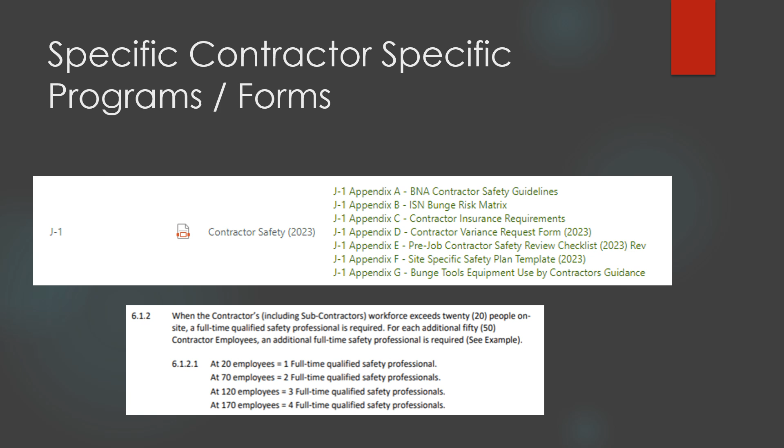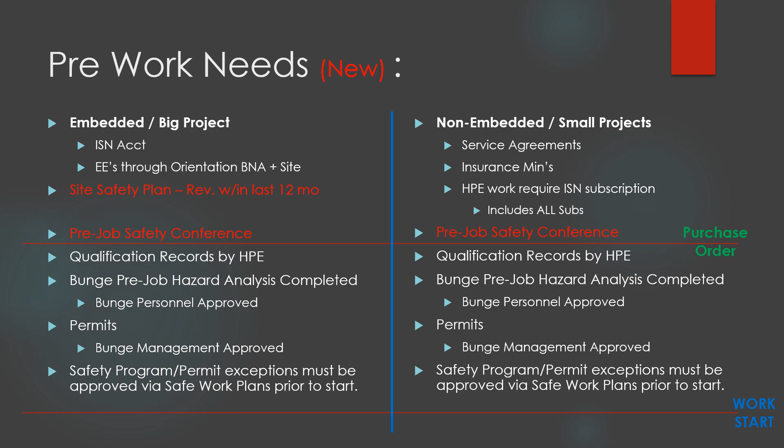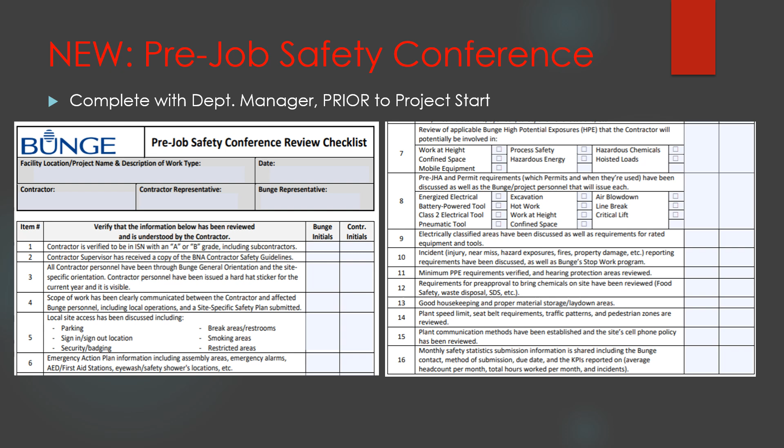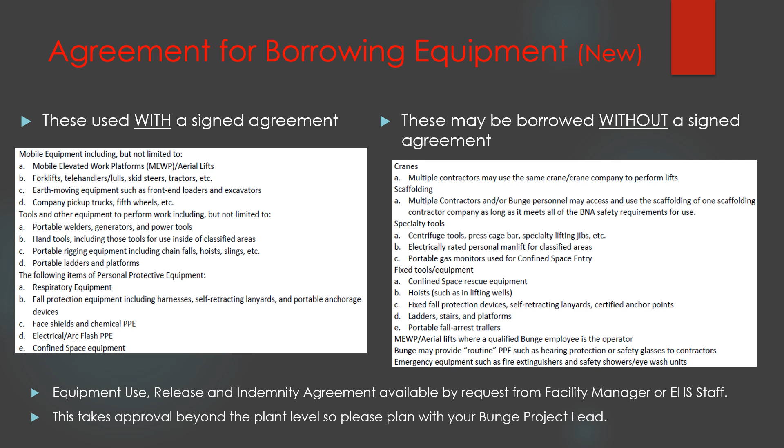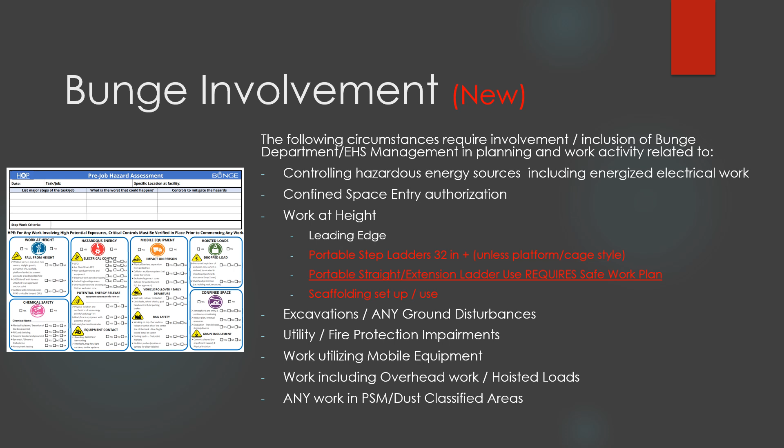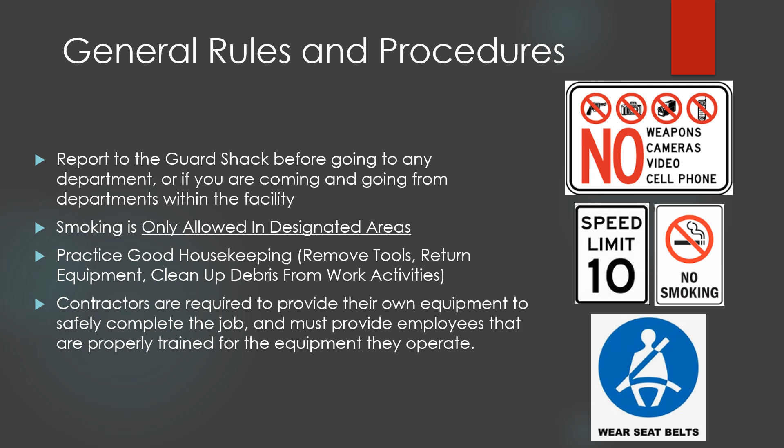Please be sure your employees are trained and qualified to do tasks expected of them. Bunge expects anyone not yet qualified and in training be with another, so work is supervised and still effectively safe. We reserve the right to request individual training records at any time.

Please be sure to use dedicated contractor parking or staging areas only, and work with Bunge management where changes or projects warrant other needs. Everyone must obey all posted signage and warning lights to ensure their safety, and our ability to account for them in the event of an emergency.

Classified areas, whether for combustible dust or flammable and combustible chemicals, must be respected and electronics not taken into the area, unless rated and/or permitted, after verification with Bunge management. This includes 3D scanners, phones, watches, and any other electronic instrumentation.

Rated radios are available upon request from Bunge management in the Guard, where high-risk activity drives a need to ensure communications are maintained in any of these rated areas. Be sure to discuss these needs with your Bunge project lead, so any needs are captured ahead of the work.

Lastly, please be advised that Bunge has widely expanded its use of video surveillance both indoors and outdoors. While this is primarily for deterring security incidents and assisting in quality investigations, it may be used for any investigation, pending reasonable cause.

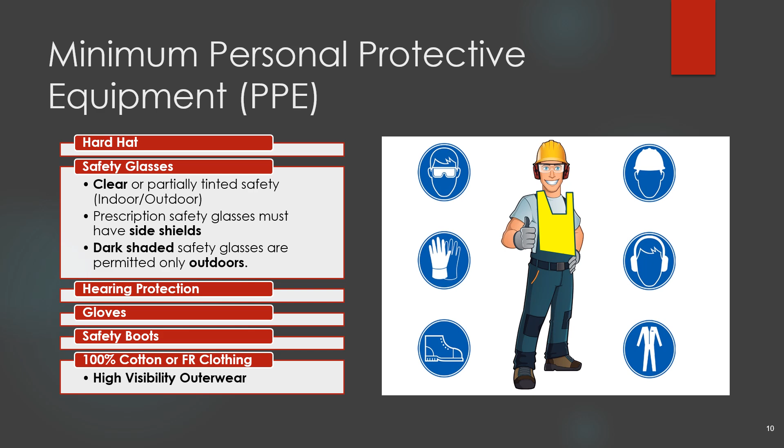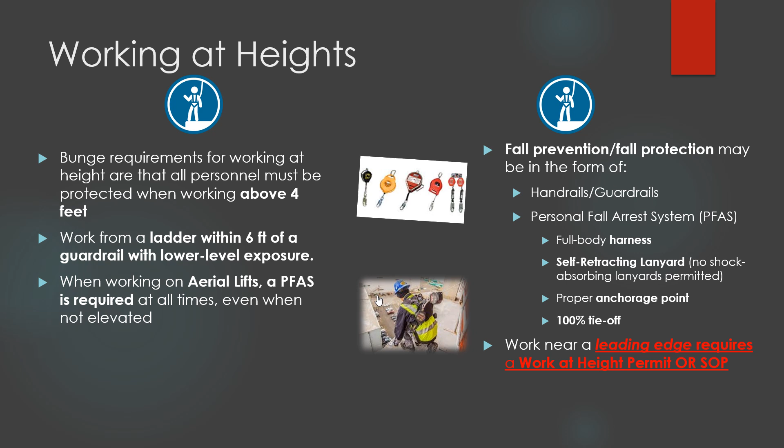Beyond simply using fall protection for cases described in the last slide, there are many exposures that require a permit to be completed, along with the pre-job hazard analysis, prior to starting work. These cases are listed here.

Please review carefully. Many of these require the permit to ensure appropriate use of fall protection, as improper use can still be fatal or debilitating. This is to ensure fall clearance, swing fall, and rescue plans have been properly considered and developed.

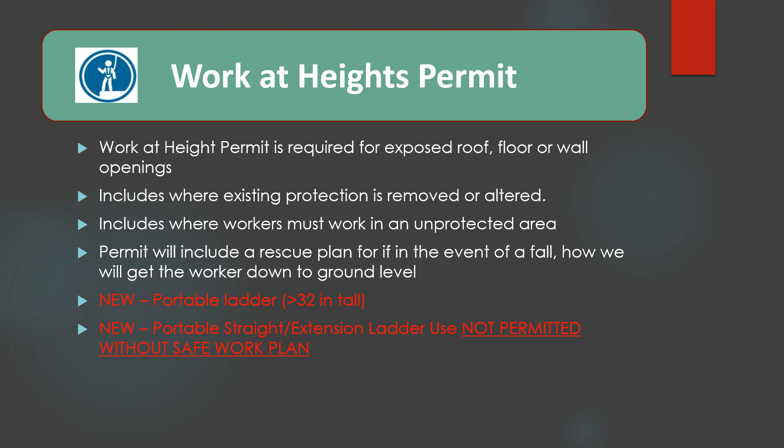This slide was additionally created to illustrate the scope of the work at height permits. You are encouraged to request clarification if there are any questions about the applicability of this permit.

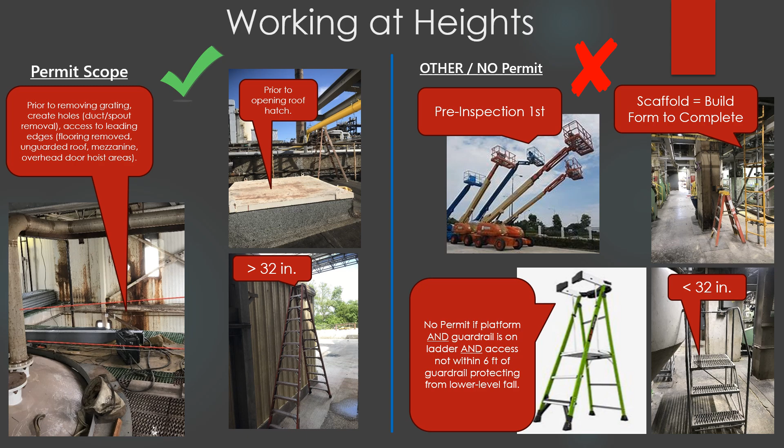Only those competent in scaffolding building, installation and inspection may bring scaffolding on site and use it. Scaffolding must be provided by the contractor, if necessary, in completing the job. Bunge has preferred scaffolding vendors. Contact your project coordinator for those vendors' contacts if you need scaffolding.

Daily pre-use inspection is required by a competent person before the scaffold can be used. Do not use scaffolding that does not have a green or yellow inspection tag. Be sure to read tags. Green tagged scaffolds may still require the use of fall protection.

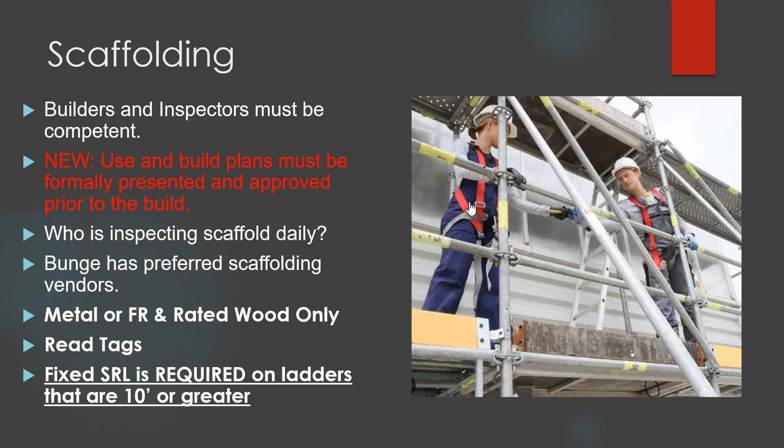Before working on any equipment, it must be properly locked out. Most commonly referred to as lockout tagout, Bunge identifies this as verify, lock, tag, and try, or VLTT. Before work on the equipment starts, all personnel that will be working on it must verify that the correct equipment is being shut down and locked out, with the help of Bunge.

Once this is verified, all affected employees in the area must be notified that the equipment will be shut down and locked out. Bunge employees will be responsible for shutting down the equipment, following detailed shutdown procedures. Once equipment has been completely shut down, all sources of energy, such as electrical disconnects or valves, must be locked out and tagged by all personnel that will be working on the equipment.

Tags shall identify the person by name and the contractor company. All residual energy must be relieved, and attempt to start the equipment to verify it will not start back up. Once the work is completed and the equipment is properly put back together, all affected personnel shall be notified, and then locks and tags may be removed, prior to putting the equipment back into service.

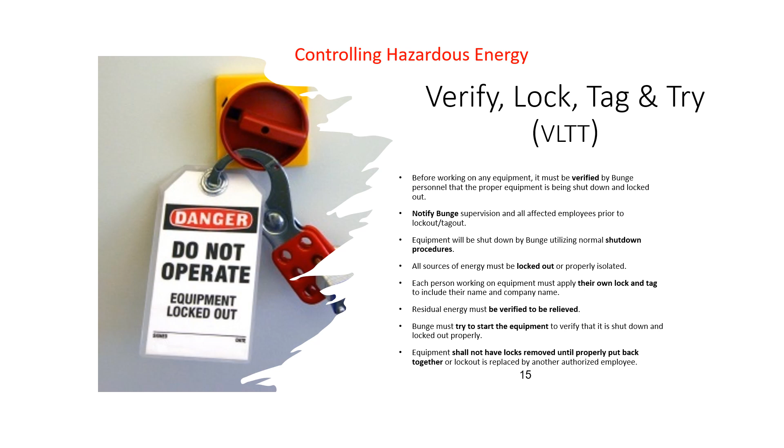At Bunge, there are many types of mobile equipment, including forklifts, semi-trucks, tractors, utility vehicles, skid steers, payloaders, and train engines to name a few. Critical controls are those we most heavily rely upon to prevent pedestrian exposure to moving mobile equipment.

Specific to rail safety, please, when near railroad tracks, expect movement at any time, and keep clear unless authorized to be near the rail equipment or tracks.

A unique control to Decatur, Indiana is that we utilize the Blue Flag permit process and positive protection when any work is conducted within 12 feet of the track center line. You will need to see the department leadership for the Blue Flag permit to ensure our rail operators know of the work going on, but will also assist you in correctly applying positive protection. More rail information is on the next slide.

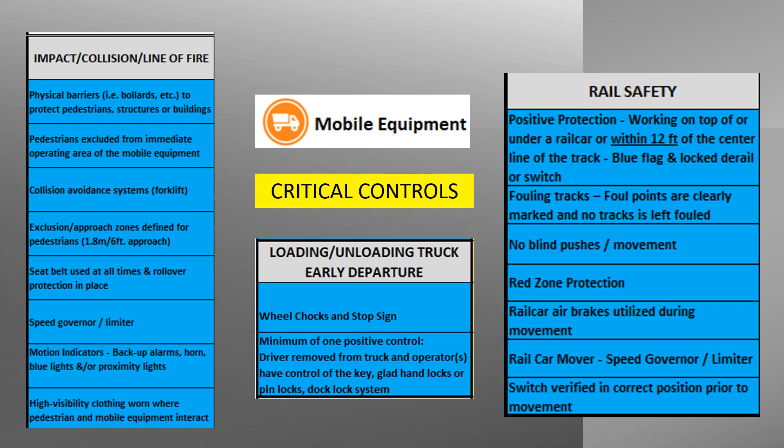Another Bunge HP involves hoisted loads. Hoisted loads are any type of material, parts, or equipment that are lifted off the ground with cranes, hoists, mobile equipment, or chain falls. Whenever lifting is involved, proper barricading and protections are required. This includes barricading of horizontal and vertical drop zones, areas where the load and lifting device could potentially fall if there is mechanical or operational error.

Additionally, when people are in hoisting areas where physical barricades must be removed, a personal fall arrest system is required by each person in the area before the barricades are removed. Personnel that are authorized to be in hoisting areas to perform work must always take proper precaution to never be under a load. The use of taglines that are long enough to maintain a safe position out of the vertical drop zone is required.

Depending on the type of lift, a critical lift permit may need to be used. Scenarios for the permit would include exceeding 75% of a crane's lifting capacity, high-value loads, lifting of personnel in a man basket, using 2 cranes, lifting over hazardous material, and some additional parameters. Verify before conducting a lift with a crane, if a permit will be required.

In the last year, Bunge has now added a permit to ensure our review of all mobile crane lifts. Please be sure no lifts occur until the plan and conditions have been reviewed. While we are not experts in cranes and rigging, we do still want to ensure certain controls and involvement of those involved, including those who do know it best as the certified crane operator, rigger, and exclusion zones are effectively implemented prior to any lift.

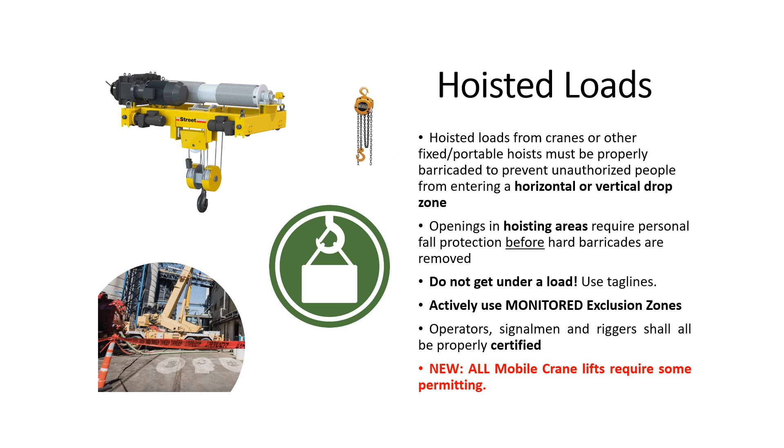Overhead work, material handling, and hoisting activities are common exposures where danger tape and tags are utilized to warn of hazards and prevent access. Be careful, as there are many other reasons for use, and always check tags to be sure you understand the hazards and are authorized to enter prior to passing tape.

In some cases, tape alone is not good enough. Leading edge exposures must use substantial protection to restrict access, and where hoisting or working overhead, these areas must now be actively monitored. This means a dedicated watch, not someone involved in the task at hand, but able to commit their attention to the area solely for restricting access.

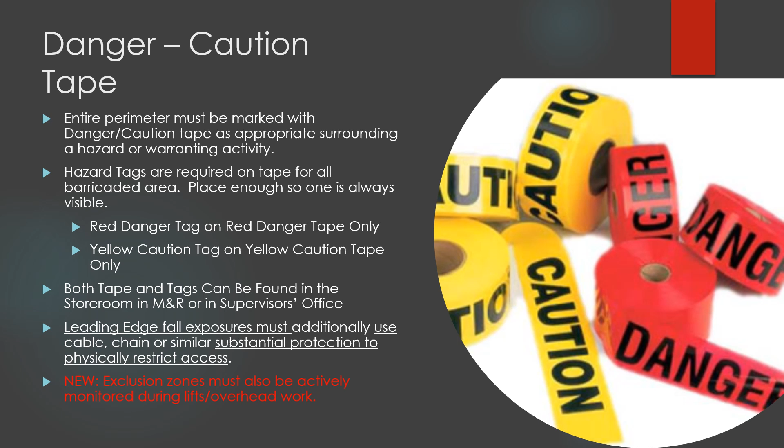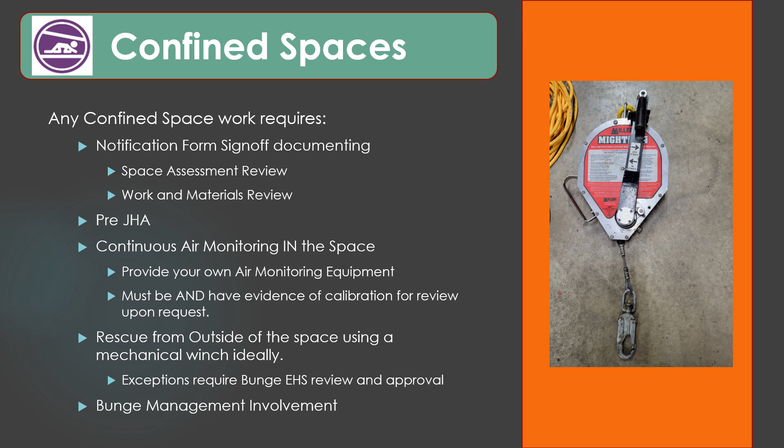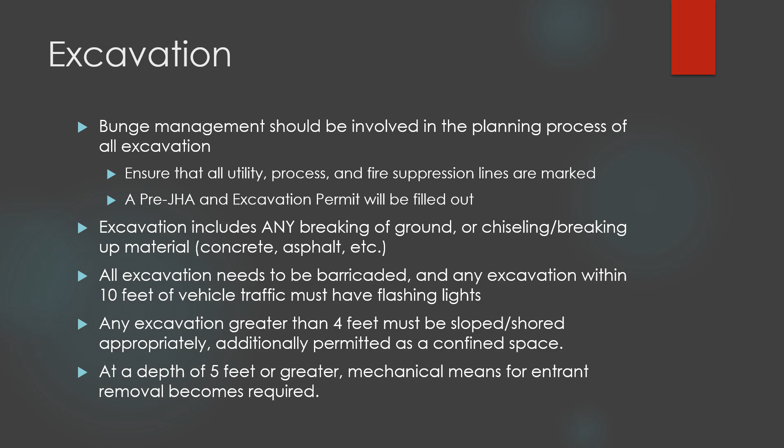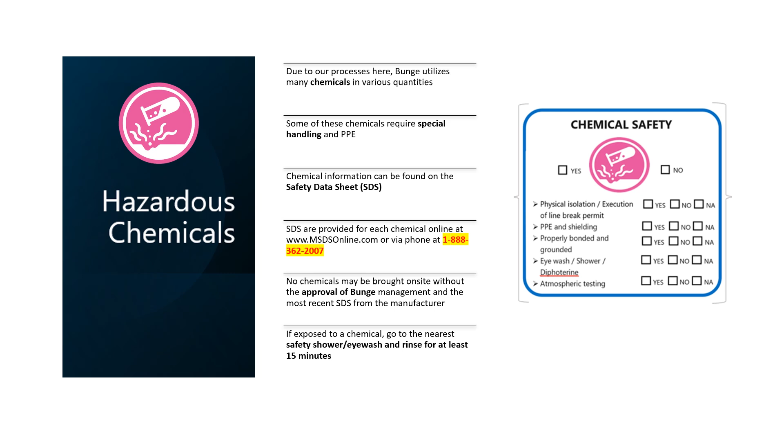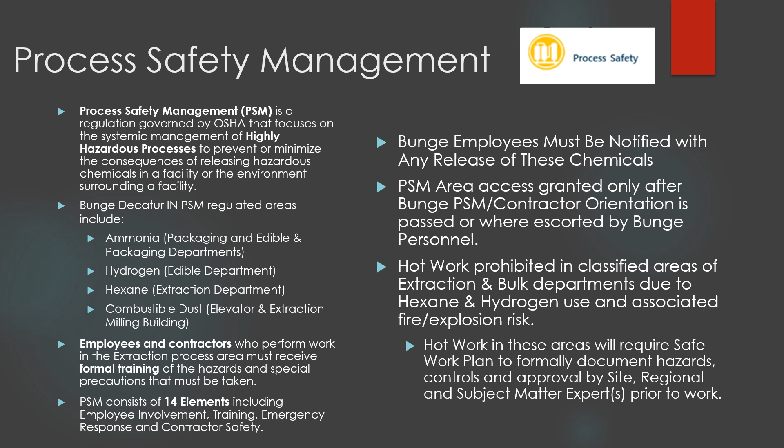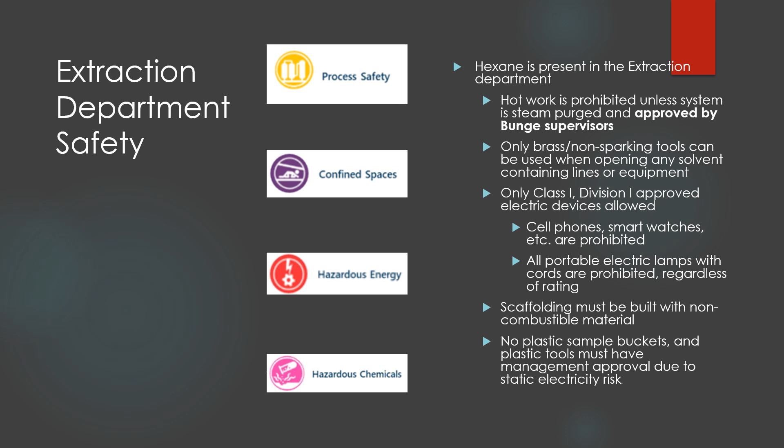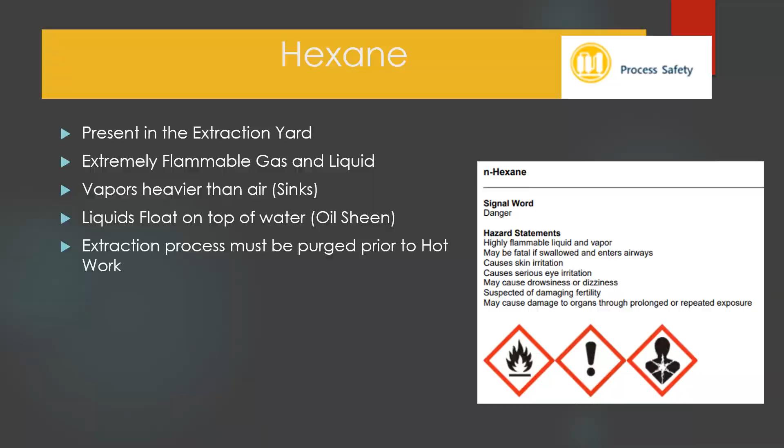There are several ways a person could be exposed to health hazards associated with hexane. Vapor inhalation can cause short-term narcotic-like effects, like drowsiness and blurred vision. If exposed to hexane vapors, seek fresh air immediately. A large concentration of vapor, or prolonged exposure, may require medical treatment.

Ingesting hexane or other solvents could lead to it entering into the respiratory system, which would be considered a medical emergency. Professional medical help should be called immediately. If hexane has contact with the skin or eyes, it could lead to a minor rash or severe irritation, and should be flushed with water for at least 15 minutes. The SDS will provide more detailed information, and if working around hexane, consult Bunge management to ensure the proper PPE is being used.

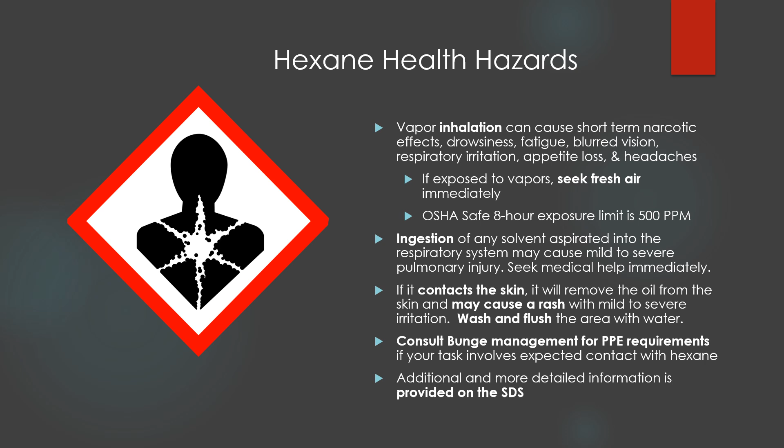In order to enter into the extraction process area, you must undergo this orientation, as well as sign in and receive permission for entry from the extraction department operator or supervisor. This includes all areas surrounded by the concrete vapor wall or fencing.

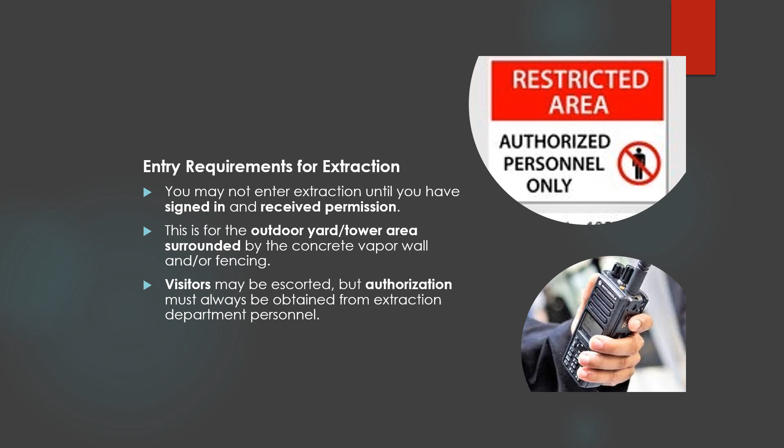All portable electric devices that are approved for use in this area must have the Class 1, Division 1 rating listed on the device. Even during shutdown, where a majority of the system is purged, there are still boundaries of 25 feet around hexane or micella containing tanks, where this classification still exists.

Along with properly rated electrical wiring and equipment, there are several other process safety devices and systems in use in extraction. These include computer-monitored process instruments, controls, and alarms; automatic fire protection equipment; snuffing steam fire protection; portable fire extinguishers; automatic hexane detectors; fireproof construction materials; and portable hexane and atmospheric monitoring equipment.

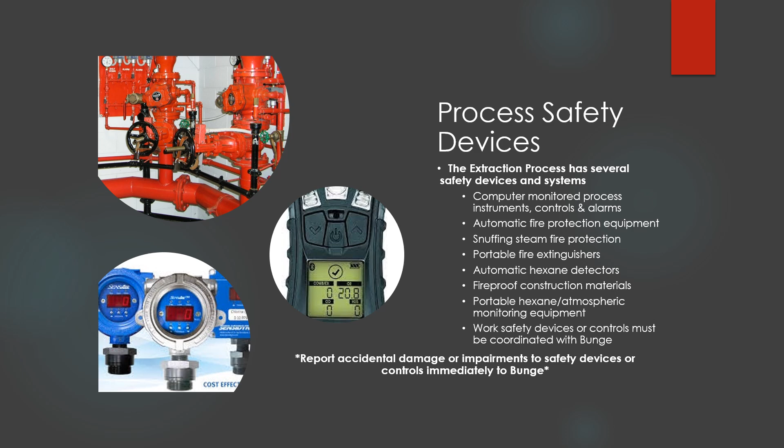Accidental damage to any of these devices or systems must be reported immediately to Bunge.

Although the extraction process is considered a high-hazard process, it is at its most stable state when it is in normal operations or completely shut down. Most maintenance work will take place during a planned shutdown, over a longer period of time when the process has been steam purged, or over a period of a day during a non-steam purged shutdown.

During a steam purged shutdown, all hexane is pumped underground, and the equipment, piping, and vessels are all purged with steam to remove vapors. After this is done, and when the facility manager approves, hot work with a permit is allowed in the extraction area. This is the only time that hot work may be performed there. All other permit procedures still apply.

If working in the extraction area during a steam purged shutdown and hexane vapor or liquid is discovered, all work, especially hot work, must be stopped and immediately reported to Bunge.

During a non-steam purged shutdown, all product and hexane is emptied from equipment and vessels, but hexane vapors are still likely to be present. No unrated tools or hot work will be permitted.

In an emergency shutdown situation caused by power outages or process upsets, contractors must leave the area immediately, unless granted permission to work by Bunge. During an emergency shutdown, the extraction process is in its most volatile state, so it is important to follow Bunge management instruction.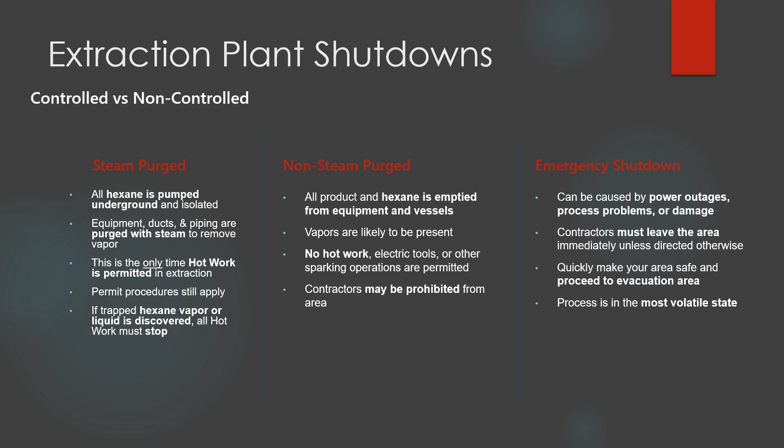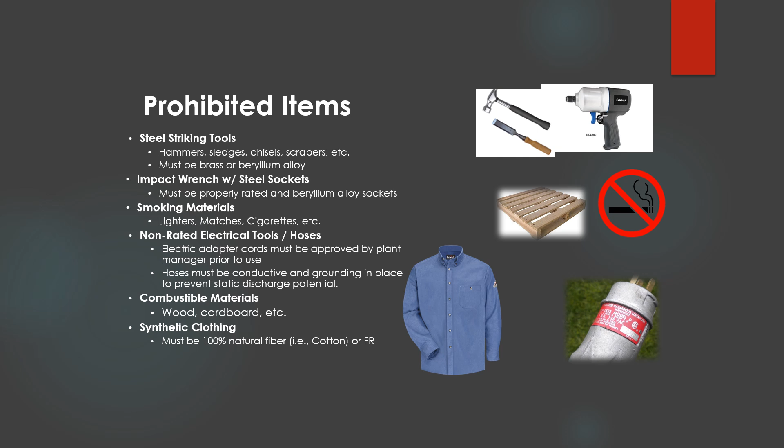Ammonia is used in the packaging department and is managed in many of the same ways hexane is in the extraction department. While main material hazards are different, that being largely physical corrosive risk and toxic health risk, many controls such as area gas monitors and alarm capabilities are the same.

Please be sure to include Bunge management in any work planning in packaging to ensure any potential impact to these product and warehouse cooling systems is understood and managed appropriately.

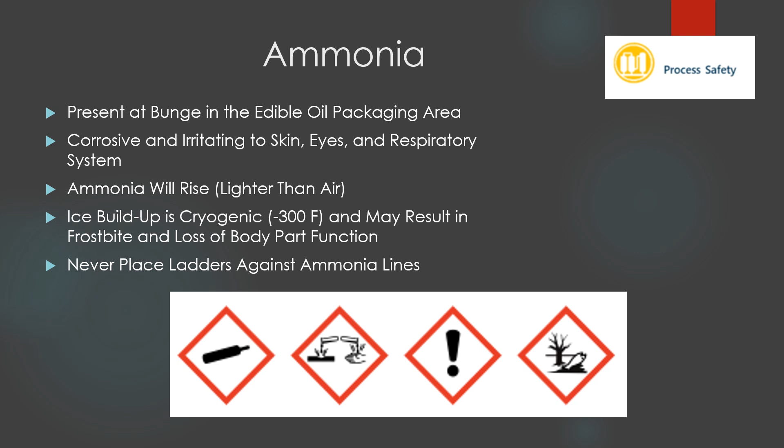Hydrogen is used in the edible oil department for cooking oil batches. This material is very flammable, so much so that the static from a leak can be enough to ignite itself. These flames are extremely hot and burn clear, making detection very hard without a thermal camera, utilizing infrared. While flammable like hexane, hydrogen is different in that it is very light and will quickly dissipate up into the atmosphere.

Please be sure to include Bunge management in any work planning in edible oil to ensure any potential impact to hydro processes is understood and managed appropriately.

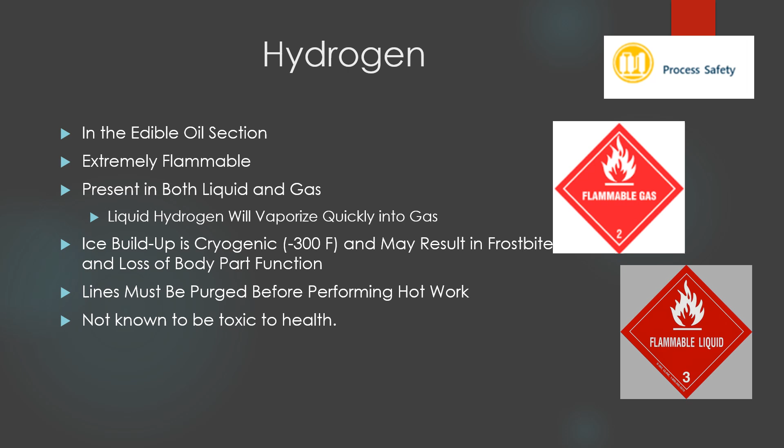Grain dust can be a significant hazard, leading to flash fire, combustion, and even secondary explosions that can be devastating. Elevator and extraction milling activities can generate significant amounts of dust, and it must be effectively managed to prevent buildup and keep risk minimized.

An important part of process safety management is management of change, or MOC. Any changes made in extraction, milling, elevator, hydro, or ammonia processes, equipment, or materials will require a formal review. This includes changes to equipment, like switching to a different motor, materials of construction, such as changing piping from carbon steel to stainless steel, or process changes, like adjusting alarm set points. The detailed review of management of change and pre-startup safety reviews will take place by a team to ensure safe design and implementation of the change.

Nitrogen is commonly used at Bunge to create an inert blanket on top of oil storage tanks to protect oil from oxygen, which promotes oil degradation. Additionally, nitrogen pressure is used to push oil to or from tanks, or out of transfer lines. Please be sure to consider this for any line break or vessel work, as nitrogen is an asphyxiant, replacing oxygen, and can be fatal if undetected or managed incorrectly.

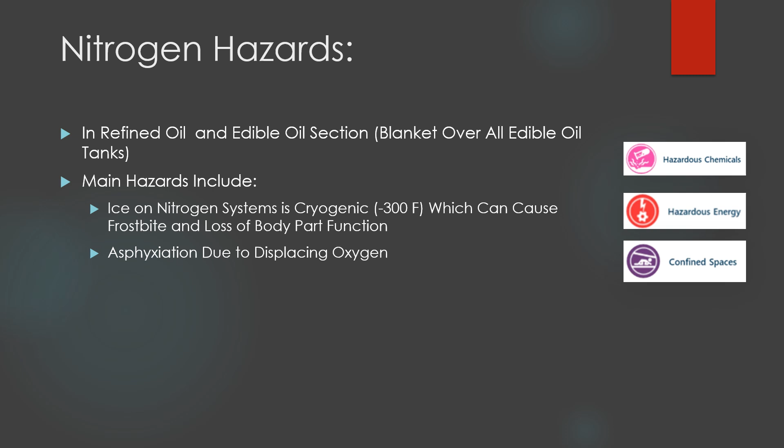Acetic anhydride is utilized in refined oil processing reactions. This has a pungent odor, much like concentrated vinegar, which is this material's reacted byproduct. Because odors are irritating, there are escape respirators located throughout the second floor of refining to aid and provide breathing air in the event of a leak until able to exit the building. Any work on or around acetic anhydride lines or oil reactors should include refined oil department management in planning.

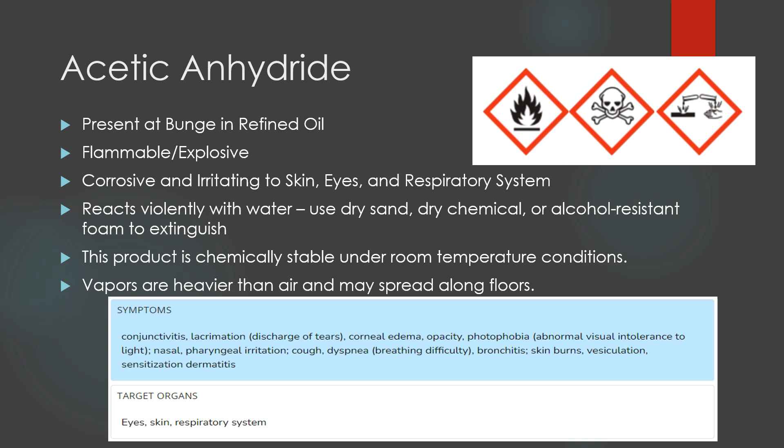Hydrogen peroxide is utilized in refined oil processing reactions. This has a pungent odor and is an oxidizer, which can fuel fires to much greater intensity. Additionally, this material is corrosive, with a pH of 3.5, and can lead to burns where skin or eyes are unprotected. Because odors are irritating, there are escape respirators located throughout the second floor of refining to aid and provide breathing air in the event of a leak until able to exit the building. Any work on or around hydrogen peroxide lines or oil reactors should include refined oil department management in planning.

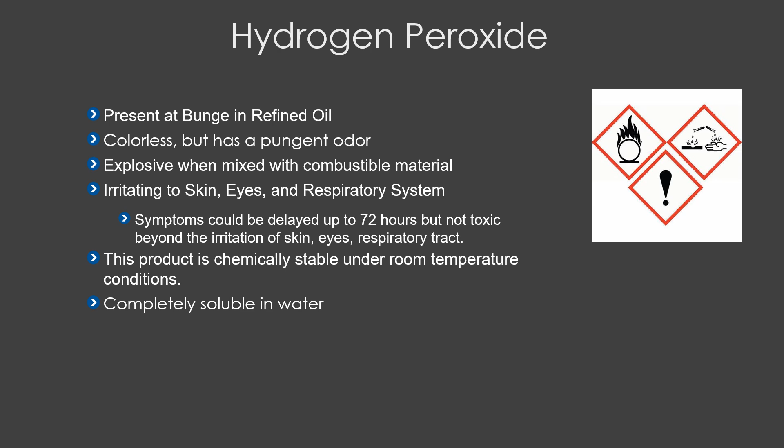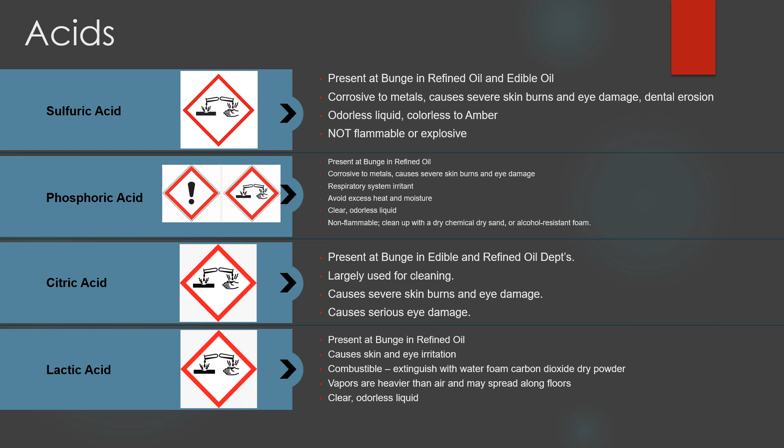Several acids are used throughout the refining and edible oil departments. These are largely used and plumbed directly into process vessels, and exposure directly would be unanticipated. However, if your work is in or on these lines or vessels where these are utilized, please involve department management to ensure cleaning prior to vessel entry or line breaking by process neutralizing and flushing.

Caustic soda, or sodium hydroxide, NaOH, is a highly corrosive chemical commonly used for housekeeping purposes in edible oil and refined oil. Please be sure any work with caustic soda has the extra eye and face protection required with both goggles and face shields. Even low percentage mixtures are damaging. Caustic materials do not burn like acids do, so contact and initial flushing may feel adequate, but many times the material has not been buffered and is continuing to react and damage your skin. Be sure to report any caustic soda exposure and, prior to beginning work, engage the department supervisors to effectively plan to mitigate these risks.

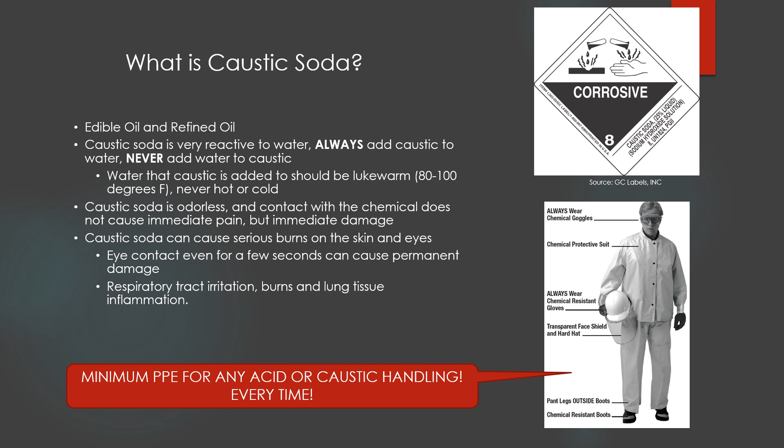With a facility as old as ours in Decatur, Indiana, we do have many places where asbestos is present. These have been signed to clearly identify known locations. If you suspect a material may be asbestos containing, please do not disturb it, but report it to department management so samples and status can be objectively defined.

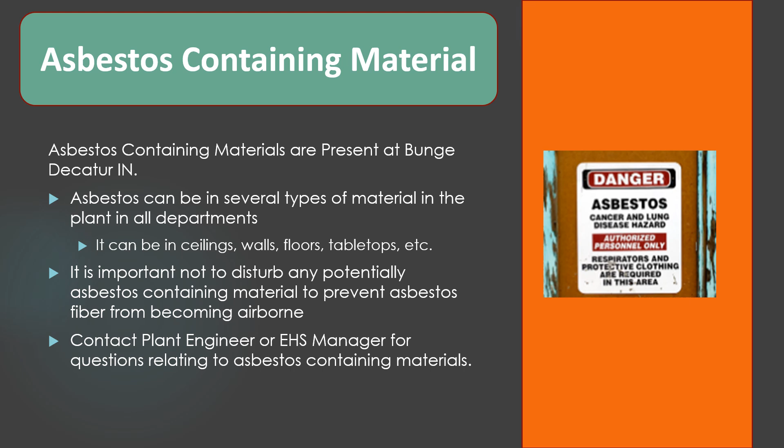Hot work is considered any flame-containing, spark, or heat-producing activity. Please be sure all related activities are reviewed with department management prior to beginning work, as there are area and activity requirements to consider. These are largely captured in the required permit for this work, but the slide here outlines several of the basic requirements.

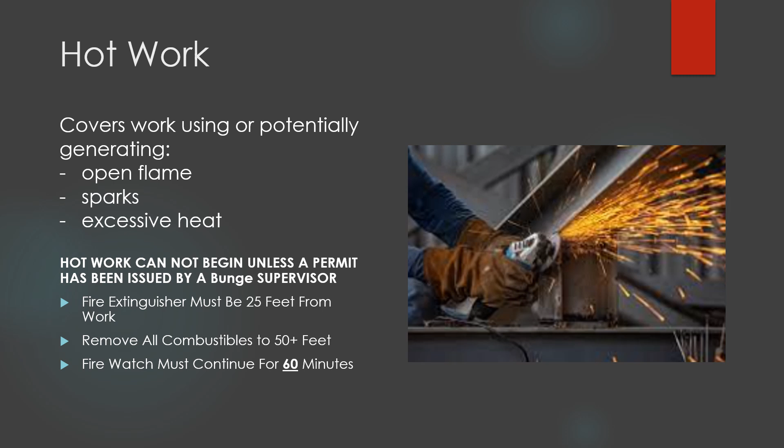This slide will give a brief overview of the additional permits used at Bunge and may be required for you to complete your work safely.

Line break permits are used when first opening lines, pipes, or vessels where there is potential for harm due to the contents, such as high heat, being under pressure, and corrosive chemicals. The air blowdown permit is required when cleaning an area using compressed air. This permit will only be issued when equipment has been shut down.

Electrical tool permits for the Class 1 and Class 2 areas are required when electrical tools may not be intrinsically safe, but meet the required ratings. A pneumatic tool permit is required when using pneumatic tools in the extraction area. Not all pneumatic tools may be used, so it's important to verify this with your Bunge contact.

At the time of this material's development, these permits all exist as separate forms, but there is a project to combine rated area tool permits, so please be aware this may change in 2025.

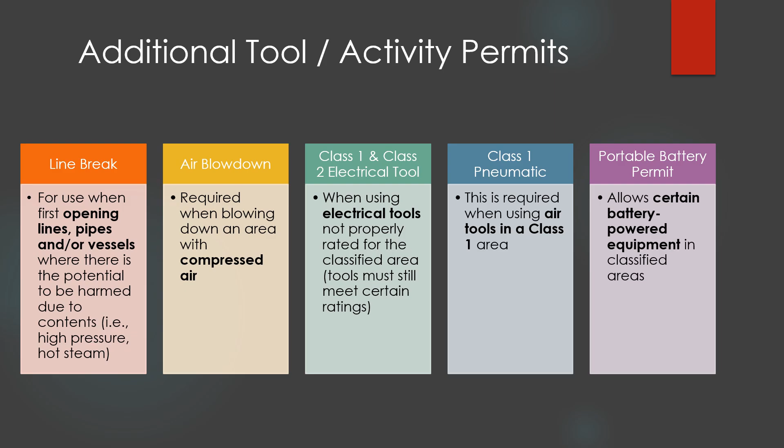Transitioning now to some general site information. This slide is an aerial view of the Decatur, Indiana campus. It is rather large, and if you have any trouble locating the right place to be or go, please do not hesitate to ask. Maps are available at the guard shack.

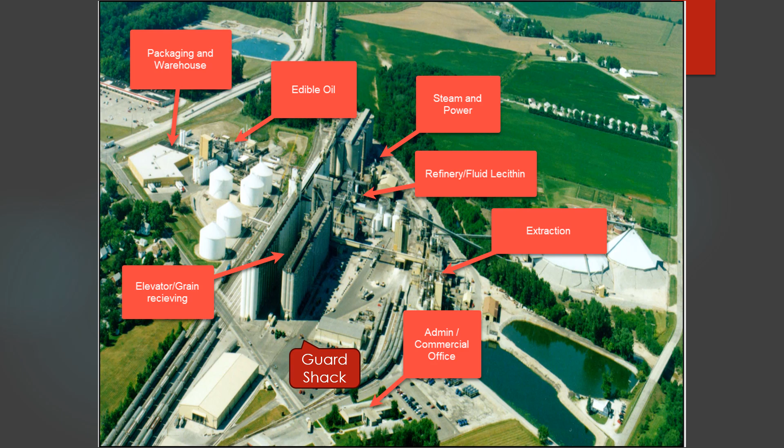In the event of fire, spill, medical, or any other emergency, please work to initiate appropriate emergency action promptly. Locating someone with a radio, or if near a phone, reaching out to the guard where normally attended is the ideal first step. This helps us get a broader radio instruction out, faster than trying to call or yell for people one at a time.

Please be sure to define communications for higher risk work, where rescue or emergency potential is more likely to be needed. Make sure any who may be called are aware of the work and involved in the rescue planning. Radios to assist with this are available with the guard, but are only signed out day by day. For larger projects, additional radios can be coordinated with your Bunge project contact.

Muster points for evacuation are localized by department and shown here. Large signs are posted to assist. Be sure to know where these locations are prior to beginning work.

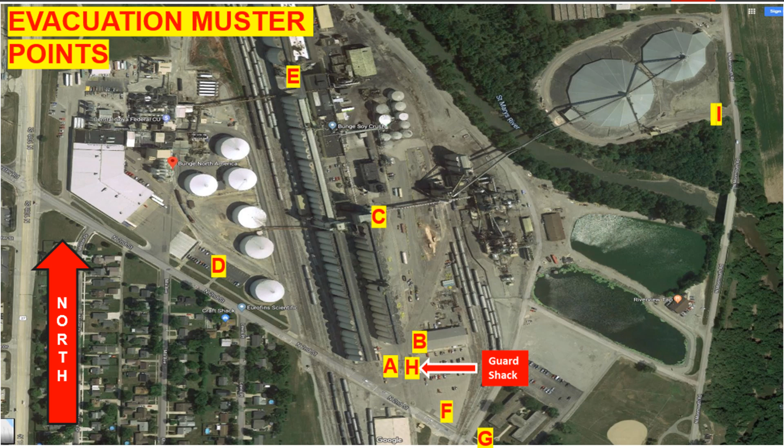Whether an evacuation or shelter notice is advised, whether by Bunge radio, public warning siren, or emergency responder, please follow directions and do not leave so you can be accounted for. It is especially important to respond the right way. These plans are written and implemented to get the response desired, not necessarily because of the cause.

For example, if there is a security threat and we want people to seek shelter, we would call for a shelter response. Just because it may be a nice warm sunny day, do not assume the alarm is for a tornado, just because that is the most common cause for sheltering alarms. You might otherwise be exposing yourself.

Please review and abide by these good manufacturing practices while working in edible oil, refined oil, or extraction departments. These practices are in place to protect food and feed from contamination that could harm consumers.

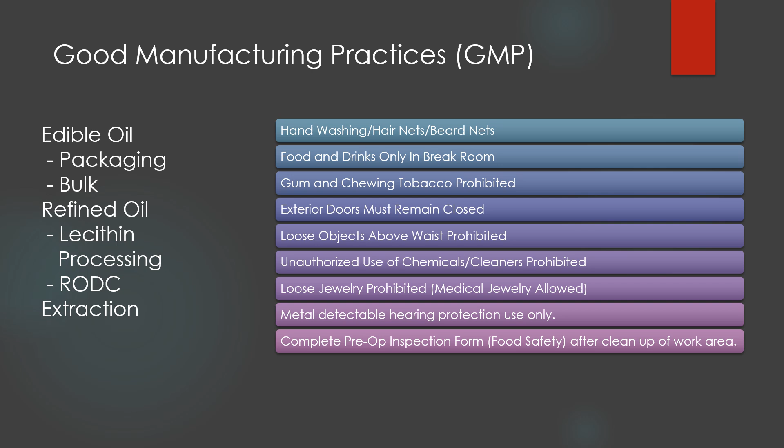Bunge strives to be a good steward of the environment and operate responsibly to minimize our impacts to the environment. As such, we expect all contractors we work with to operate in a similar way. By being conscious of our material usages and selecting the most efficient ways to change, update, and/or add new equipment or processes, we want everyone to help us keep our footprint as small as possible.

Please do not hesitate to share any opportunities you recognize to further improve our environmental performance. Please be sure to minimize waste and energy usage for work you are conducting for us, to the extent possible.

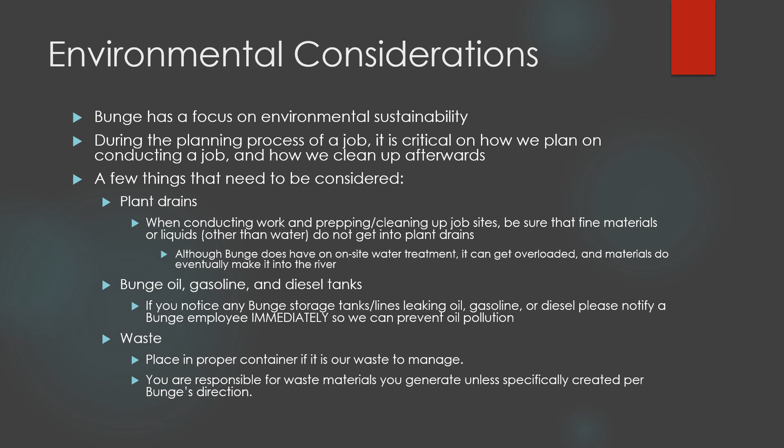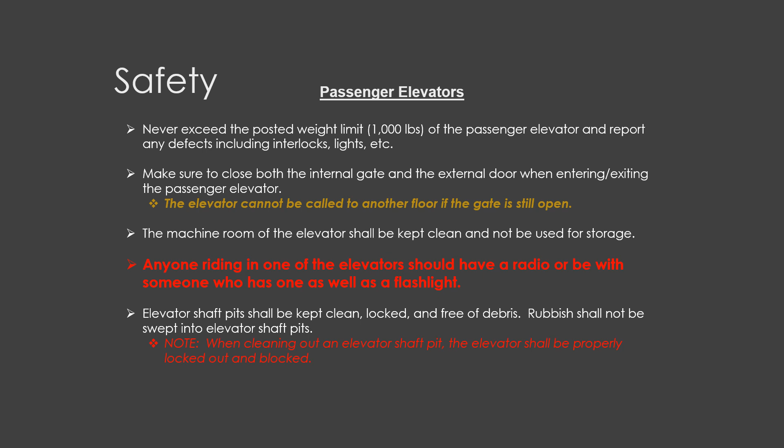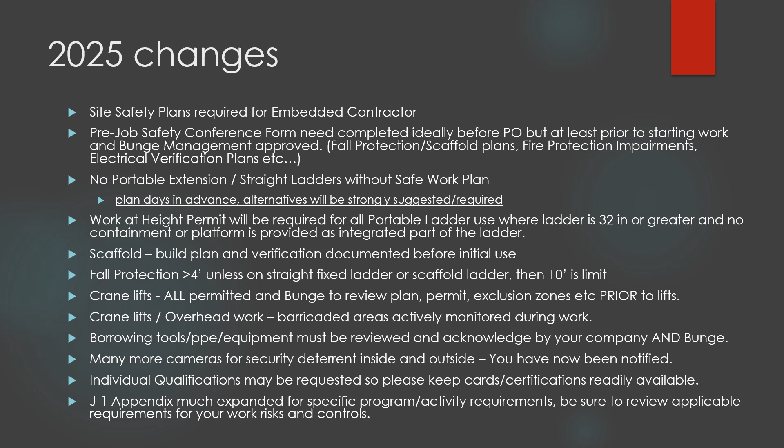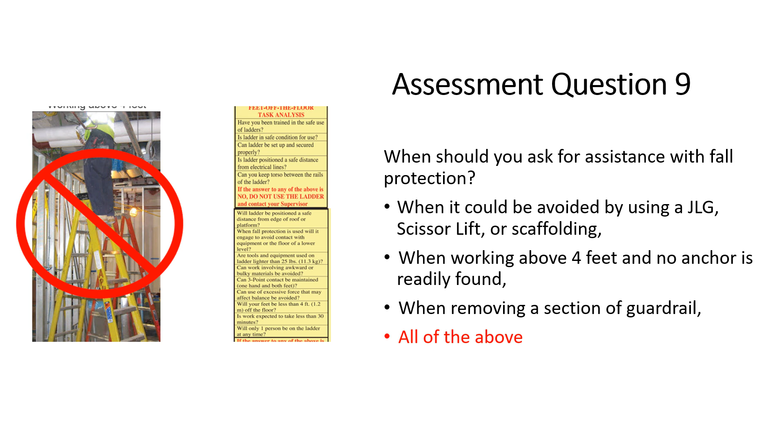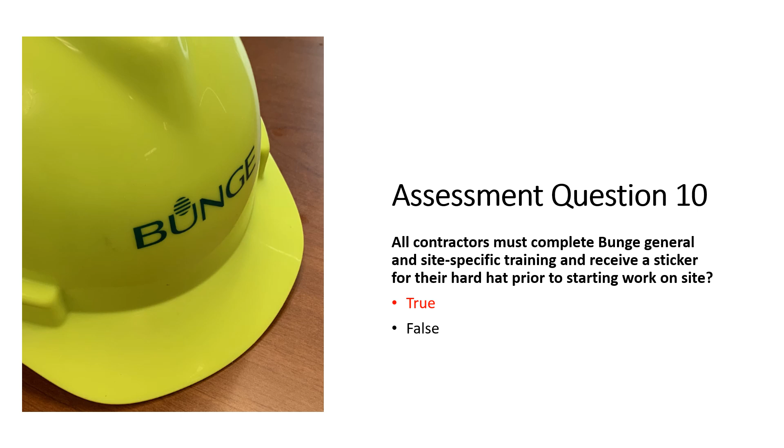This concludes your site-specific orientation required for the Bunge Decatur, Indiana plant. Additional requirements and/or those in this presentation may change as standards evolve. We look forward to partnering with you to complete safe work throughout 2025.